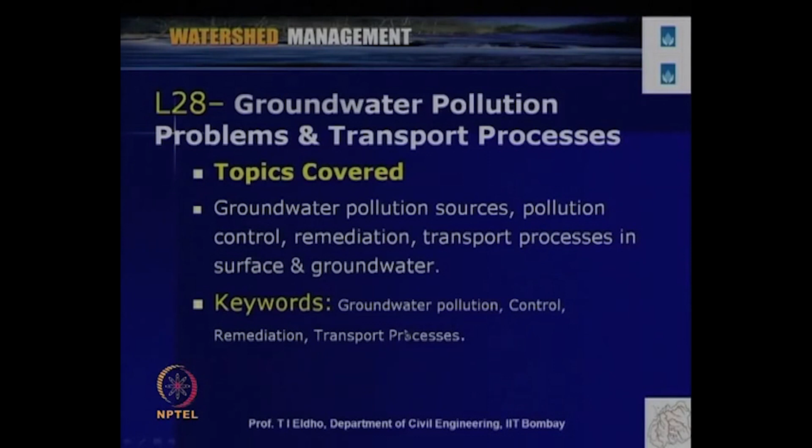In module number 7 on management of water quality, today in lecture number 28, we will discuss groundwater pollution problems and transport processes. Some of the important topics covered today include groundwater pollution sources, pollution control, groundwater pollution remediation, and transport processes in surface and groundwater. Some of the keywords for today's lecture: groundwater pollution, control, remediation and transport processes.

As we discussed earlier, when we deal with water management within a watershed, we have to deal with the surface water and the groundwater. It is not only the quantity of water to be made available to the flora and fauna or to the people within the watershed; we have to see the quality of the water. As we discussed in the previous lecture, surface water quality as well as groundwater quality are major issues which we have to deal with nowadays.

Due to various reasons, the quality of groundwater or surface water has deteriorated very much. So, in today's lecture, we will see the problems related to groundwater quality. In the last lecture, we discussed the surface water quality issues. When we deal with watershed management, groundwater is a major component as far as water resource is concerned. Groundwater is a part of the hydrological processes which we have already considered.

With infiltration, the water joins the water table or the aquifer systems, and then interacts within the systems. So, if any pollution source is there on the surface of the planet or the watershed, it will affect not only the surface water but the groundwater also. So, when we deal with watershed management, groundwater quality is also a major issue.

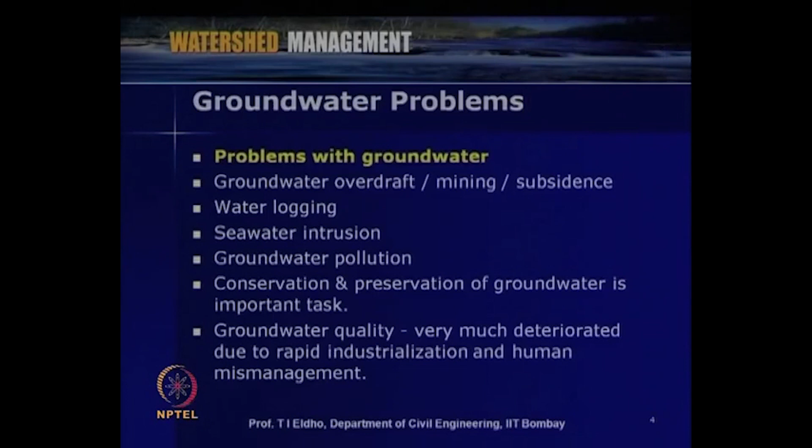It is not happening mainly due to natural causes, but due to human interventions within the system, and it is not appropriately done. So, those are some of the major reasons as far as the deterioration of the groundwater is concerned. So, as we discussed earlier, as far as the management of groundwater systems is concerned, we have to deal with the quantity of the groundwater and the quality of the groundwater.

So, as far as quantity is concerned, the total volume that may be withdrawn annually from the aquifer. So, we have to see that there is a balance between what is recharged and what is withdrawn from the aquifer systems, so that the groundwater table will not go down drastically. And then the location of pumping and artificial recharge wells and their rates.

So, if you consider an aquifer system, depending upon the recharge rates, how much we can pump out of the aquifer systems, or if you are going for recharging, how much we have to recharge with respect to the available water. So, all these things we have to deal with effectively for groundwater management.

So, we have to take certain decisions as far as the groundwater quantity is concerned and also groundwater quality is concerned. So, as I mentioned, even if sufficient quantity is available, if the quality of the groundwater is not good, then we cannot use it for the purpose it is meant for. So, we have to take decisions related to groundwater quality.

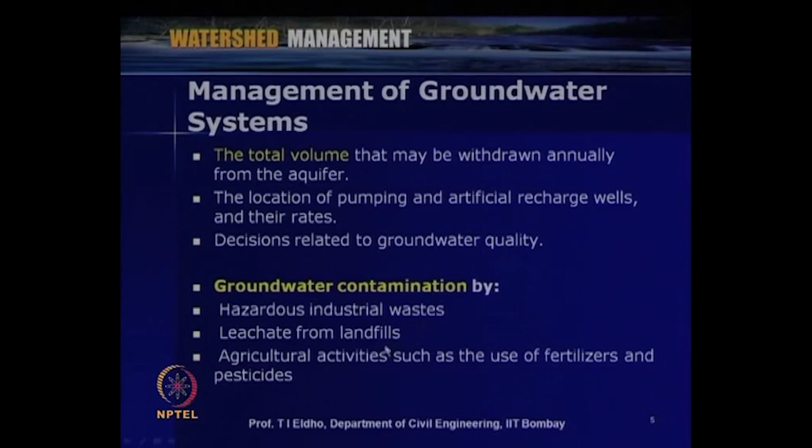So, groundwater contamination, as I mentioned, can be due to various sources like hazardous industrial waste, leachate from landfills, agricultural activities such as the use of fertilizers and pesticides. So, as we discussed in the last lecture, these kinds of pollution can be either point source pollution or non-point source pollution. So, point source is what is coming directly, like from underground tanks, if a leakage takes place and that is going to the aquifer systems, that is point source.

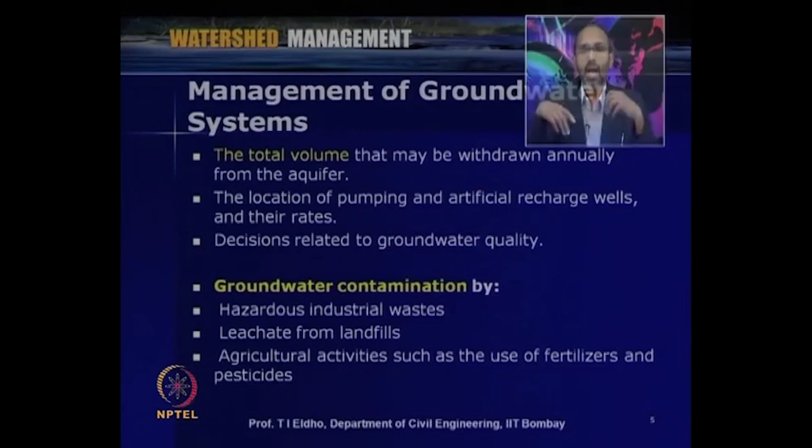But non-point source, like agricultural sources, say nutrients or herbicides or pesticides, these kinds of pollution are non-point source pollution. So, we have to deal with the groundwater systems effectively. That way, groundwater systems have to be managed effectively as far as quantity and quality are concerned.

So, management means making decisions to achieve goals without violating specified constraints. So, for example, from a given aquifer, if we want to pump out 1000 meter cube per day, the objective is to meet that 1000 meter cube per day,

but we have to see that certain constraints are met, like the groundwater level should not fall below certain specified limits, or the quality of the groundwater should be good enough with respect to the standards for drinking water or agricultural purposes. So, we have to see that specified constraints are met.

So, good management requires information on the response of the managed systems to the proposed activities. So, here that means the aquifer systems or groundwater systems. So, if we are pumping this much water, what happens, or if a contamination is going through the groundwater system, how it is spreading and what will be the effects. So, this information enables the decision maker to compare alternatives and ensure that constraints are not violated.

So, for example, if there is a pollutant source to the aquifer systems, and water is pumped for drinking or water supply purposes from that aquifer system, then whether there will be an interaction. So, how we can manage this pollution source or the plume.

So, the decision maker has to take a decision by considering various options like groundwater modeling or groundwater pollutant modeling or contaminant transport modeling. So, any planning of mitigation or control measures once contamination has been detected requires the prediction of the path and the fate of the contaminants in response to the planned activities.

So, like you say, if we are going for the control measures, we have to see how much portion of the groundwater system is affected, where the plume is moving and at what rate it is moving, and whether that will reach the pumping well which we are pumping for water supply or other purposes. So, all these issues we have to see.

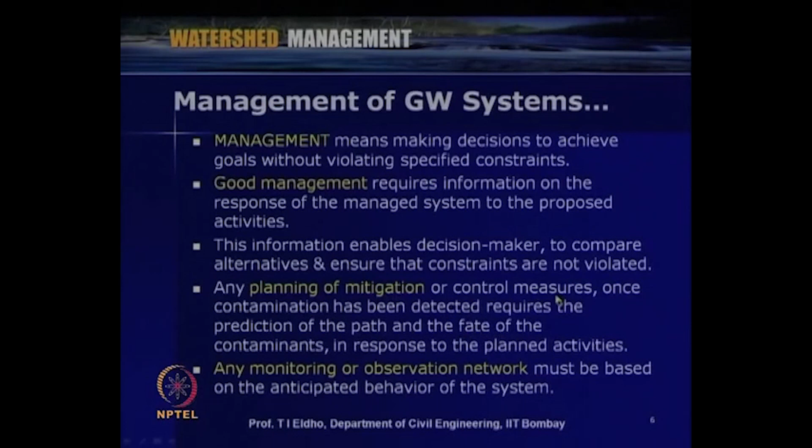So, any monitoring or observation network must be based on the anticipated behavior of the system. Through groundwater modeling we can identify the anticipated behavior of the system. Then, if we have a monitoring or observation network, through that we can identify the best way we can manage the groundwater systems as far as groundwater pollution is concerned.

So, what we are discussing is related to groundwater system management with respect to quantity or quality. Now let us go into the details of groundwater pollution sources and then pollution control and the remediation aspects. So, groundwater pollution problems. As I mentioned, when we are dealing with the water resource in a watershed, we have to see that not only is sufficient quantity of water available, but quality is also good enough. The water is useful only if quality is safe. So, that is a very important aspect.

So, quality is indicated, as we discussed in the previous lecture, by various indicators like dissolved or suspended solids, whether the water is basic or acidic, like a pH indicator, or the biological quality. So, when we discuss on a watershed basis, a river basin basis or an aquifer basis, we have to see what are the important sources of pollution. And then we have to see what are the important forms of pollution, whether the form is dissolved salts or domestic or industrial waste, or heat pollution or radioactive materials, pesticides, manures, etc.

So, what is the source of pollution, what kind of pollution is there, what is the form of pollution, and then how the pollutant or the contamination is moving within the aquifer system. Pollutant transport or solute transport generally takes place with the flowing water. In the aquifer system, the groundwater is moving from one location to another according to the hydraulic gradients and other parameters. So, we have to see how the solute is transported. Various processes, as we discussed earlier, like advection and hydrodynamic dispersion, control the pollutant or contaminant movement within the aquifer systems.

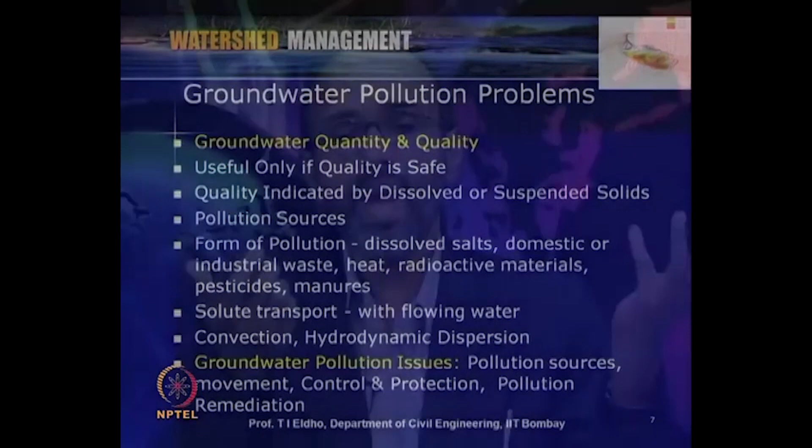So, when we discuss the various issues related to groundwater pollution, we have to see some of the important things like pollution sources, then pollutant or contaminant movements, then how we can control the movement of the plume or contamination, and then how we can protect the groundwater systems, and wherever it is polluted, how we can remediate it, so that we can retrieve it back, even though not to the original quality, but to a certain extent. So, what kind of remediation is possible. All these issues we have to consider.

So, groundwater pollution issues include source identification, then identifying the movement of the contaminant, then control and protection, and then pollution remediation. These are some of the important issues which we have to consider when we deal with groundwater pollution. So, now let us look into the important sources of pollution.

So, groundwater contamination sources. Here I have listed some of the important contaminant sources, like natural contamination, agricultural contamination, industrial contamination, underground storage tanks, land application and mining, septic tanks, waste disposal injection wells, landfills, etc. If this is the watershed or area which we are considering, if farms are there, then non-point sources of pollution, and then septic tanks or landfills. With rainfall, the contamination will be seeping down, and then that will be joining the surface water or the groundwater.

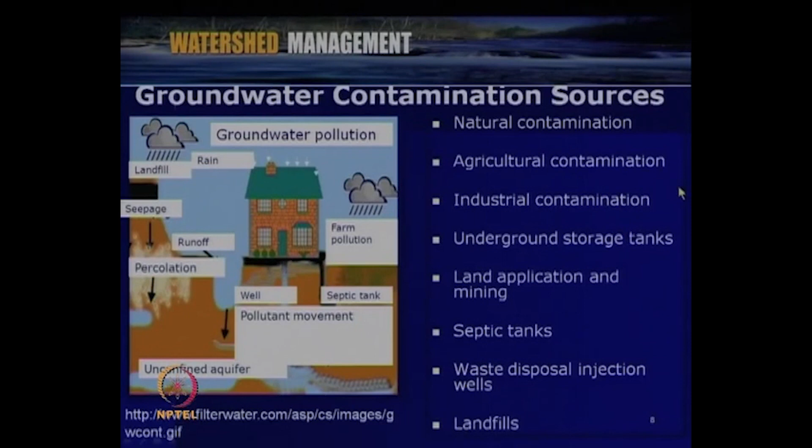So, that way various sources of pollution are possible. We have to identify the important sources of pollution, and then deal with the corresponding source to control the pollution and for remediation. Now let us look into various aspects of these groundwater pollution sources. As I mentioned, the important sources of pollution we have already discussed. The first one is domestic waste. Domestic waste can be like household waste, septic tanks; the liquid fraction from septic tanks pollutes groundwater, and inefficient design increases pollution.

So, especially household waste, especially the sewage water coming from the house, most of the time will be directly draining either to the surface water or the drainage systems. That can penetrate down or infiltrate down to the aquifer system. So that way domestic waste can be a source, and where septic tanks are there, the leakage related to septic tanks can be a source of pollution.

Then agriculture pollution, as we discussed in the previous lecture also. Artificial manure or fertilizers, pesticides, herbicides, then nitrate pollution, eutrophication, health problems. In drinking water, nitrates and those kinds of pollutants are a long term source of pollution. Pesticides, insecticides, herbicides, fungicides, all these things beneficial to farming cause a serious threat to the surface water and the groundwater.

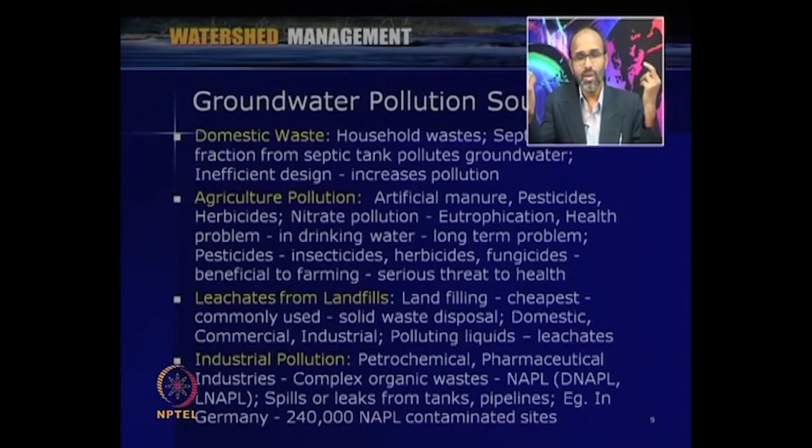If the landfills are not scientifically done and proper measures are not taken, then from the landfill a liquid called leachate is produced when rainwater mixes with the contaminant source within the landfill. That can penetrate down to the aquifer or groundwater systems and become a source of pollution. So the third one is leachates from landfills. It is one of the commonly used cheapest solutions for solid waste, whether domestic, commercial or industrial. These polluting liquids called leachates are a major source of pollution as far as the groundwater system is concerned.

Then the next major source is industrial pollution. Industrial sources like petrochemical industries, pharmaceutical industries. All these produce complex organic waste like non-aqueous phase liquids, dense or light, then spills or leaks from tanks, pipelines. These pollutants, coming directly onto the soil surface, can infiltrate down to the aquifer systems and be a source of pollution to the groundwater, or wherever surface water pollution is there, surface and groundwater interaction makes it a source of groundwater pollution.

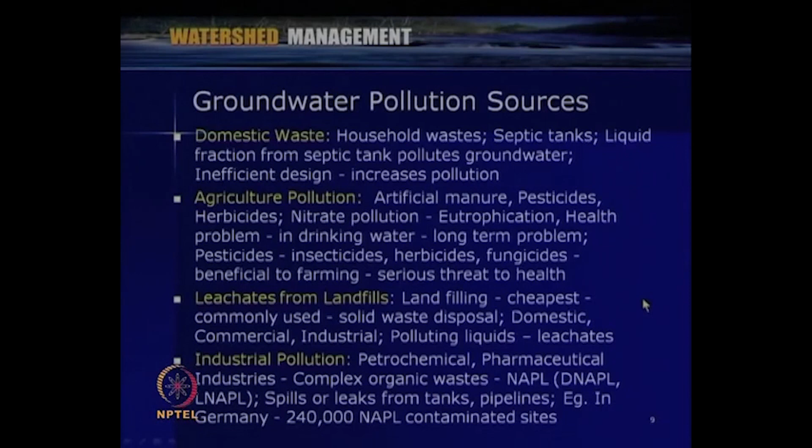For example, in Germany about 240,000 non-aqueous phase liquid contaminated sites have been identified at various industrial sites. So industrial pollution is a major source of pollution. Then contaminated land and urban pollution: the effect of the industrial revolution, like waste disposed in land around urban areas, for example mining and foundry waste, tars, oils, phenols, etc.

These are all sources of pollution for subsurface water or groundwater. For example, in the United Kingdom, about 500 square kilometers of land is polluted, meaning its soil is polluted, in about 50,000 sites. Whenever rainfall runoff interacts with these sites, the contamination forms a plume that moves through the subsurface water and becomes a source of pollution for the groundwater. And then mining and seawater intrusion pollution.

Water draining from mines will be acidic, with sulfates. So a lot of pollution will be there: acidic or sulfate pollution, iron pollution, cyanides, etc., in solution. This pollutes surface and groundwater. So abandoned mines are a major threat as far as groundwater is concerned.

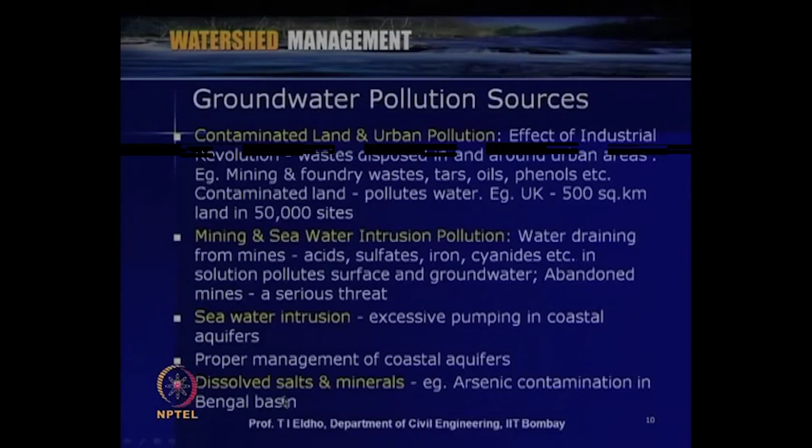Then dissolved salts and minerals, like arsenic contamination in the Bengal basin. This arsenic contamination is actually caused due to overdrafting of the groundwater. Due to that, certain minerals or salts within the soil leach and become a source of pollution. So dissolved salts and minerals are also another source of pollution.

The changes in chemical concentration occur in the groundwater system by four distinct processes. Mainly advective transport, meaning when groundwater is moving, contaminants like dissolved chemicals move along with the groundwater flow.

Then hydrodynamic dispersion, which includes mechanical, hydraulic, or molecular and ionic diffusion. Various intermixing within the pores takes place, and diffusion and dispersion processes occur. So hydrodynamic dispersion is another important mechanism of pollutant or plume movement.

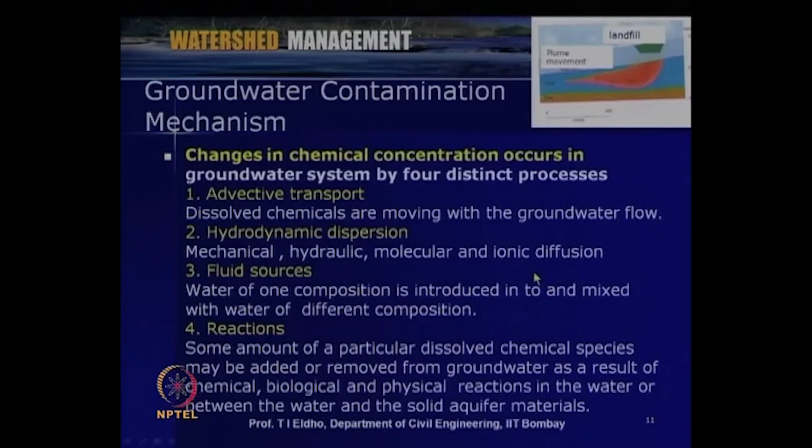So now, what we discussed is we have seen the groundwater pollution sources, and the mechanism of this plume movement or contamination spreading. Now how we can protect the groundwater or control the pollution. Let us look briefly into various pollution control measures. Once aquifers are contaminated, it is very difficult to restore, it is a very expensive process. So it is always sensible to prevent the pollution.

Vulnerability of pollution depends on aquifer nature, like the hydraulic conductivity, what kind of soil is there, and what type of contamination is there. There are many parameters depending upon which the vulnerability may be serious or mild, such as flow speed and unsaturated thickness. So we can prepare vulnerability maps showing the possibility of aquifer contamination.

For example, if there is an industry or a source of pollution identified, then for that particular aquifer system or area or watershed, we can prepare vulnerability maps. So within a certain number of days, this is the area which may be polluted, or if this kind of leakage takes place, these are the possibilities. That way we can have vulnerability maps.

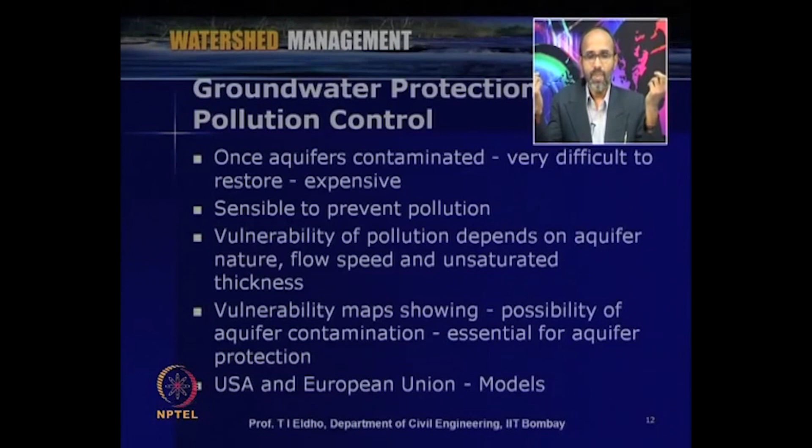In many countries like the United States of America and European countries like Germany, Netherlands, and United Kingdom, vulnerability maps have been prepared since groundwater is one of the important sources of water supply in these countries. To protect groundwater, they have prepared groundwater vulnerability maps. From these maps we can identify whether a particular aquifer system is vulnerable, and what kind of measures can be taken to protect groundwater as a resource.

We have seen that various sources of contamination exist. If we can control the source itself through various strategies, we can reduce the scope of groundwater pollution. So let us look into some aspects of source control strategies, to minimize or prevent pollution before contamination occurs.

This is the main aim of the source control strategies: the volume of waste is reduced or the threat due to waste is reduced. Whether it is solid waste or liquid waste, we can reduce it so that vulnerability is reduced.

This is mostly applicable in new sites, but in older sites we can reduce the abatement and the spreading. The source control strategies depend upon the hydrogeological parameters of the site, how much area is spread, the situation, and the kind of contaminant plume or type of waste. Depending upon that, we can adopt typical source control strategies to minimize pollution or protect the systems.

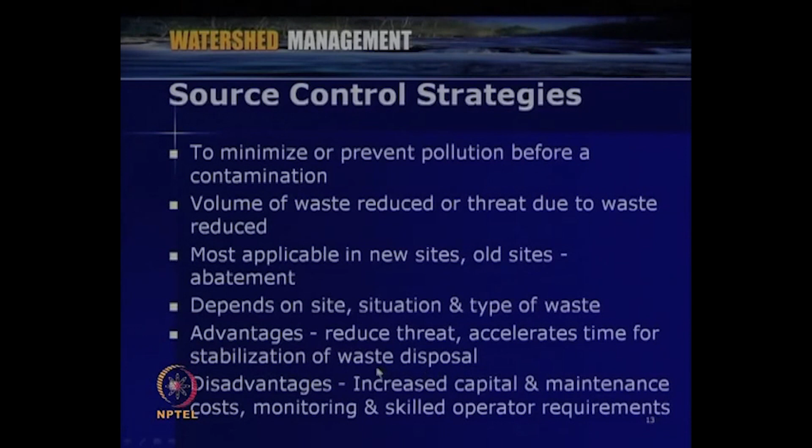Some of the disadvantages include increased capital and maintenance costs, since we have to spend money to control this source so that it does not further spread to the aquifer systems or groundwater system. We also have to go for monitoring, once the source is controlled, of any possibility of further leakage, movement, or contamination. So we have to monitor the system with skilled operators. These are some of the disadvantages.

The first zone is generally defined, in these countries, for example, by 50 days of travel time of the water to reach the well. We can delineate this zone, and absolutely no kind of pollutant or industrial activities are allowed in these zones, so that the water pumped from this area is protected. That is zone 1.

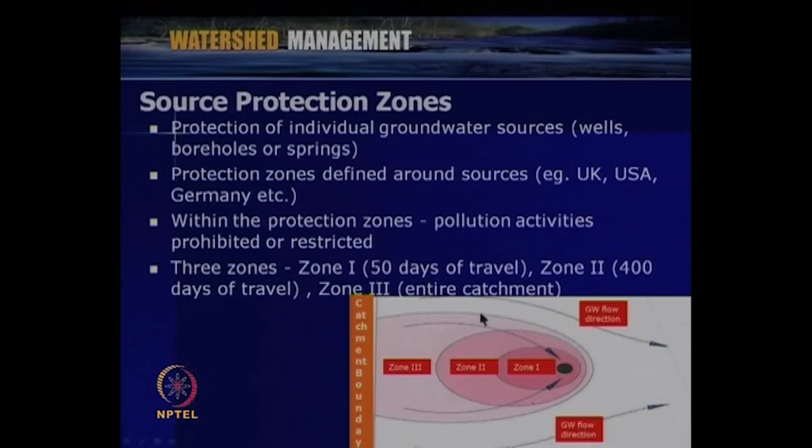The last one is zone 3, which is the entire catchment, especially if the water is used for drinking or water supply purposes. In this zone, certain activities or certain pollutant-causing industries can be stopped. So we can have these 3 zones, and within them pollution-causing activities are prohibited or restricted, as discussed for zone 1, zone 2, and zone 3.

As far as contamination is concerned, we can go for stabilization or solidification strategies. In this pollution control strategy, we isolate the waste material in a solid matrix before landfilling, for example. Stabilization-solidification strategies are very effectively used in many countries.

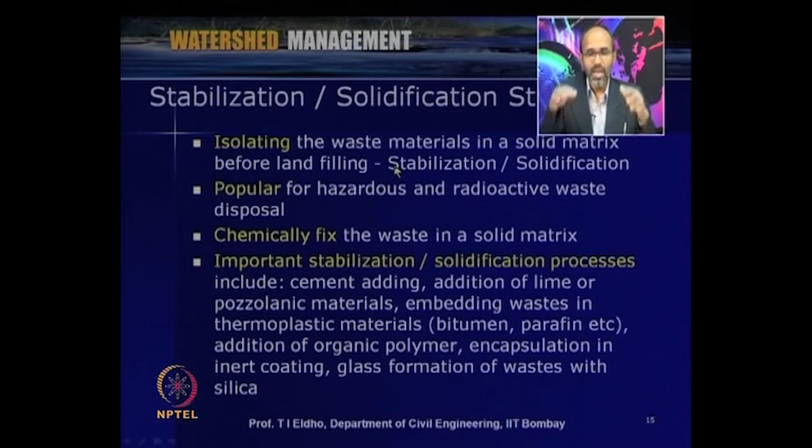These methodologies are popular for hazardous and radioactive waste disposal, especially radioactive waste. We can isolate it, put it in a concrete vault, and place it in a very deep rocky area underground, so that there is no scope for any kind of pollution.

We can also chemically fix the waste in a solid matrix. If a particular type of contamination can be mixed with certain other chemicals so that the material becomes inert, there is no source of pollution. This process is called chemically fixing the waste in a solid matrix.

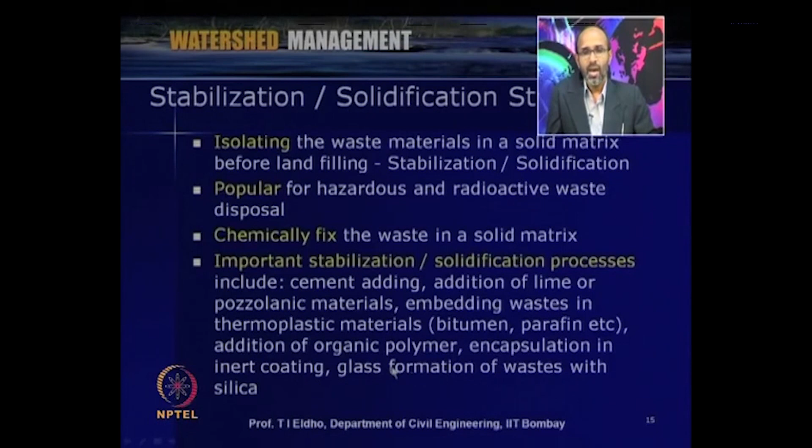Important stabilization or solidification processes include cement adding, addition of lime or pozzolanic materials, embedding waste in thermoplastic materials like bitumen or paraffin, addition of organic polymer, encapsulation in inert coating, and glass formation of waste with silica, among others. There are a number of techniques for stabilization or solidification.

Depending upon the contamination material or pollutant source, we can go for specified stabilization or solidification strategies, and that way we can control the pollutant source so that the groundwater can be protected.

This is actually plume management, where we control the movement of the water phase and hence the plume, so that plume movement is controlled. Generally, three common classes of well systems are used: withdrawal through shallow systems, deep systems, and injection of water. Through pumping or injection, an appropriate hydraulic gradient is generated within the aquifer system, so that contaminant plume movement is restricted and will not go to the nearby area of the pumping well.

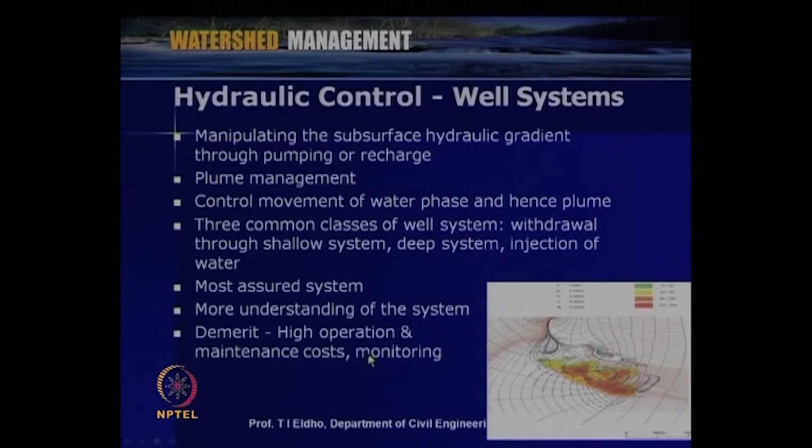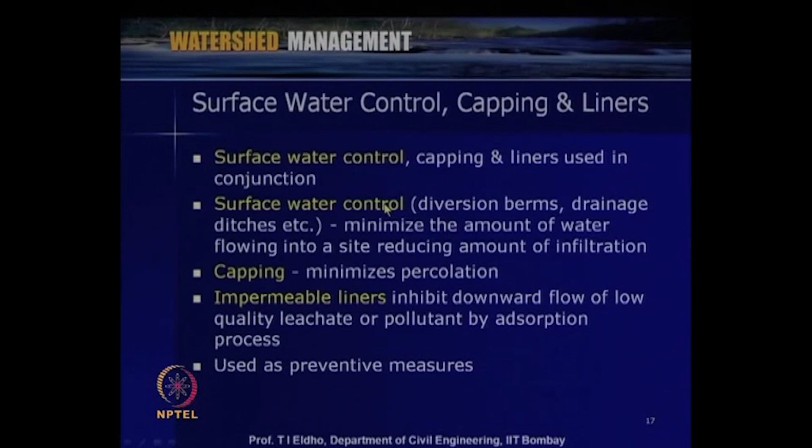Some other techniques are surface water control, capping, and liners. These are also used in many countries for groundwater protection or groundwater pollution control. Surface water control and capping and liners are used in conjunction with each other. The surface water which is polluted, we can control its movement and give certain capping or lining, so that this contaminated water is not moving to the aquifer systems. Another one is surface water control, where we can construct certain diversion berms or drainage ditches, so that the polluted water is not mixing into the aquifer systems. This minimizes the amount of water flowing into a site, reducing the amount of infiltration.

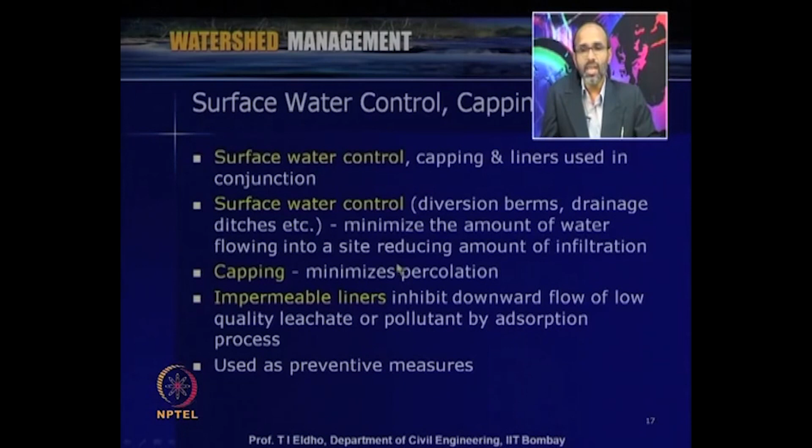We can also go for capping, so that the area is capped, so further contamination does not take place and plume movement is restricted. We can also go for impermeable liners, which inhibit downward flow of low quality leachate or pollutant by adsorption process. We can have impermeable liners using clay or other materials, so that the contaminant plume or contaminant source will not reach the pure water source or the aquifer systems. All these are used as preventive measures, so that we can control pollutant movement and protect the aquifer systems or groundwater systems.

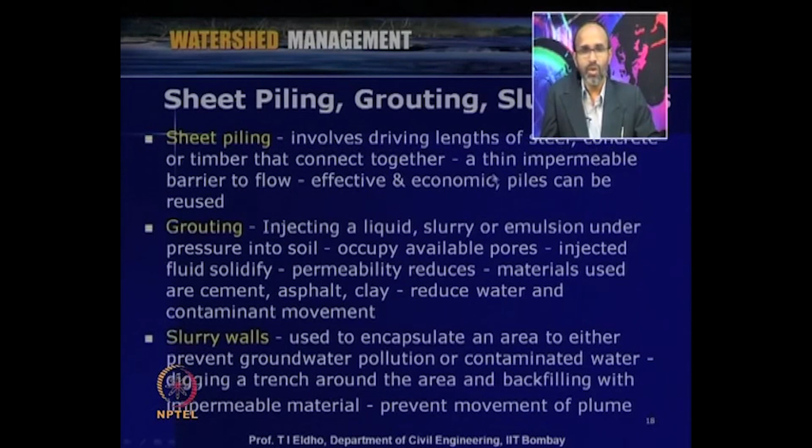Further, some other techniques used are sheet piling, grouting, and slurry walls. Sheet piling involves driving lengths of steel, concrete, or timber that connect together to form a thin impermeable barrier to flow. This is effective and economic, and piles can be reused, so we can control the movement of the pollutant.

Grouting means injecting a liquid, slurry, or emulsion under pressure into soil. This occupies available pores, and the injected fluids solidify, so that permeability reduces. Generally used materials are cement, asphalt, clay. This reduces water and contaminant movement, so that the plume is stopped at particular locations.

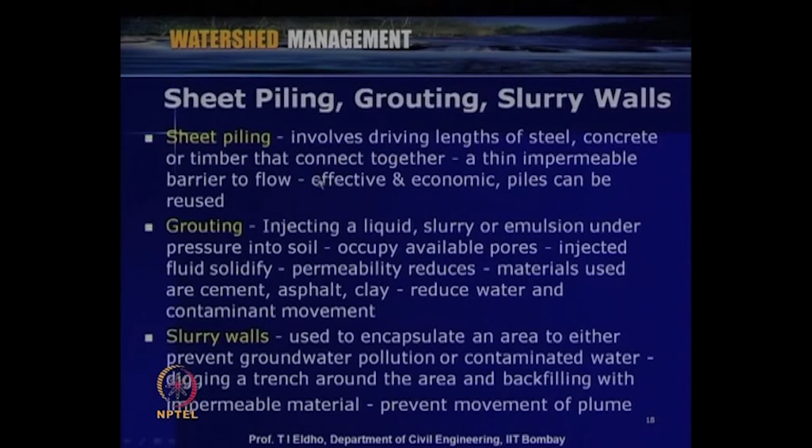Another technique is the use of slurry walls. Slurry walls are used to encapsulate an area to either prevent groundwater pollution or contaminated water, by digging a trench around the area and backfilling with impermeable material. This prevents the movement of plumes. So, as we discussed with surface water control, capping, and liners, this can also be done using sheet piling, grouting, slurry walls, etc.

So now we are discussing groundwater pollution sources, the mechanism of movement of the pollutant, and how we can protect groundwater systems or control pollutant movement. Now, once the groundwater system of the aquifer is polluted, what we can do is called groundwater pollution remediation, where we try to remediate or remove the contamination from the aquifer systems or groundwater system.

But this is a quite complex process, and it is also very expensive. Once groundwater is polluted, the question is how to restore or improve it to an acceptable standard, depending upon the use, whether for irrigation or any other purpose, and how we can get to that acceptable standard.

So, for this we have to study the system thoroughly. First we have to determine the distribution of pollution, then we have to design a remediation strategy. As I mentioned, once an aquifer is polluted, restoring it to the actual original level is an impossible task. But of course, we can take certain measures so that the contamination can be reduced to a certain level, and the aquifer systems or the groundwater can be remediated.

So, in all this process, once a contamination or contaminant plume is identified, the first step is to contain that pollution, the containment of the plume, and the second one is to go for remediation. Containment is also very important; we have to contain the plume movement, otherwise it will spread through the aquifer system. So, first step is containment, second one is remediation.

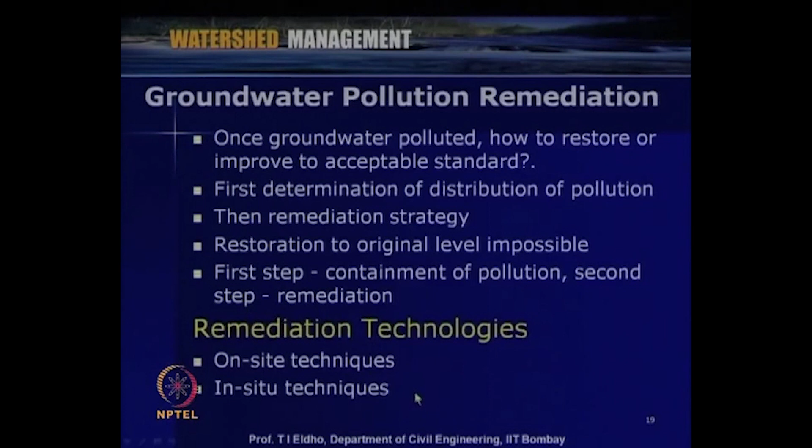Generally, as far as groundwater pollution remediation is concerned, two types of technologies or techniques are used. The first one is called on-site techniques and the second one is called in situ techniques. On-site techniques means generally we pump out the polluted water from the aquifer systems, treat it, and then either put it back to the aquifer systems, use it, or spill it to nearby surface water sources like lakes or rivers.

Then the second one is the so-called in situ techniques. Here we are not pumping out the polluted water; we are adding some materials, like for bioremediation, or using air sparging or various techniques, where at the hotspot, where the contamination is, we are trying to remediate it there itself. So, that technique is called in situ techniques.

So, as I mentioned, in on-site techniques we generally pump the polluted water, treat it and recharge it back to the aquifer systems. One of the most commonly used methods is pump and treat. There we pump the polluted water and treat it, and then either use it or put it back. In situ techniques directly remediate the contaminated water in the aquifer itself.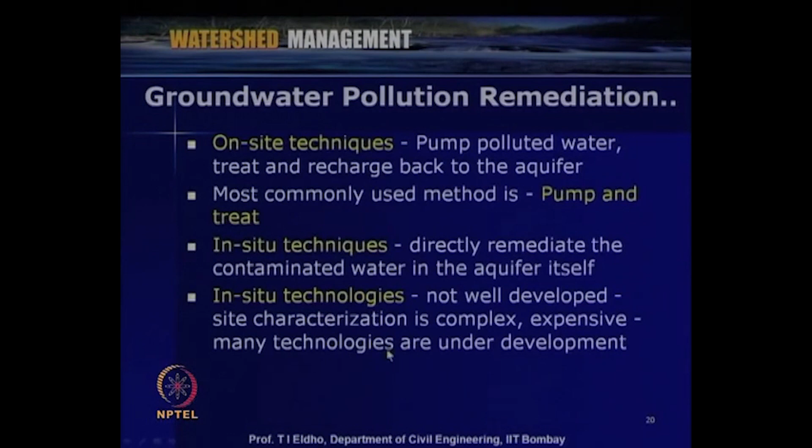So, we will have an overview of some of the important techniques used either on site, the so-called pump and treat, and some of the in situ technologies. We will have a brief review in this lecture. As I mentioned, one of the most commonly used treatment technologies is the on-site technique of pump and treat.

So, here, wherever the contaminant plume is in the hotspot, through boreholes or wells we pump this polluted water out of the aquifer systems, and then we treat it outside depending upon the contamination, and then we can either recharge it back to the aquifer system, use it, or spill it to nearby surface water sources. So, the contaminated groundwater is captured, pumped, treated and re-infiltrated back.

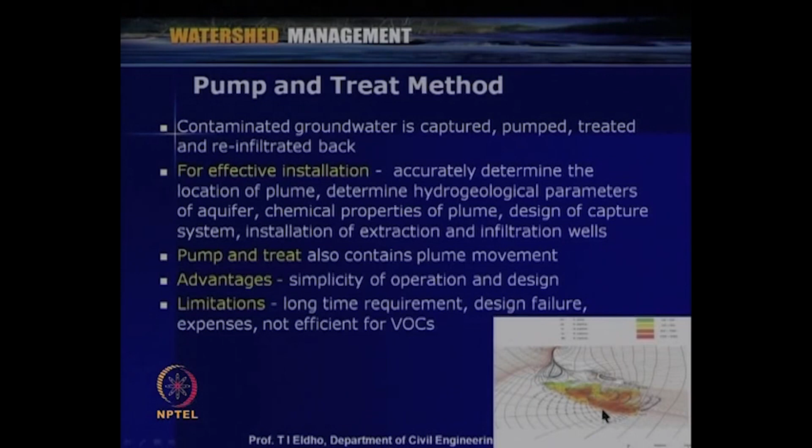For effective installation, we have to accurately determine the location of the plume. This plume location is very important; only accordingly can we design a pump and treat system. Then we have to determine the hydrogeological parameters of the aquifer, like hydraulic conductivity and porosity, then the chemical properties of the plume. Then we have to design the capture systems by pumping, then the installation of extraction and infiltration wells. If we are going to infiltrate back to the aquifer systems, we have to also design the infiltration wells.

So, this pump and treat, as we discussed earlier, is also a plume management technique, or we can use it to contain the plume at certain locations.

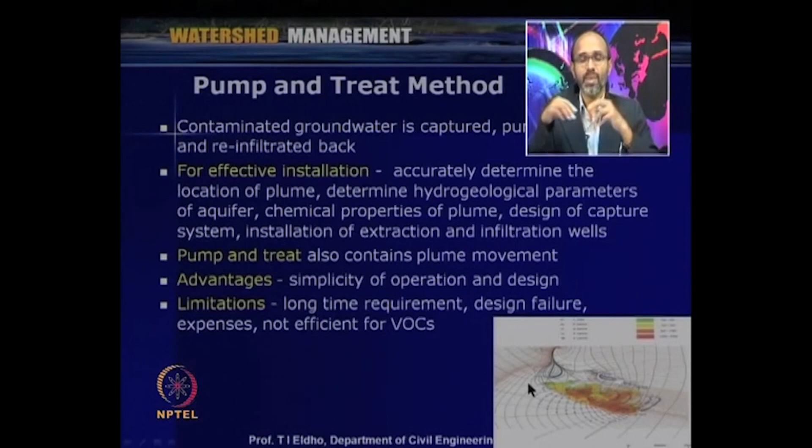Some of the advantages of this pump and treat or on-site technique include that it is simple to operate and the design is simple. But some of the limitations: it needs a long time; depending upon the area and the contamination, it may require many years to remediate an aquifer system. Then there is the possibility of design failure. If the wells are not located properly or the pumping rate is not proper, the pump and treat may not be successful. Then it is very expensive.

And then, for example, for volatile organic contaminants, this pump and treat may not be so effective. So, these are some of the limitations as far as the pump and treat is concerned. So, now let us look into some of the commonly used in situ technologies. So, the first one is so-called bioremediation.

So, in bioremediation, depending upon the contamination, depending upon the plume, we can identify certain microbial bacteria. The activities of this bacteria can be enhanced within the aquifer system itself, so that the contamination is consumed by the bacteria and converted into harmless products. So, microbial processes are used to degrade or transform the contaminants to less toxic or non-toxic forms, mitigating or eliminating the contamination.

As far as microbial processes are concerned, it can be aerobic conditions where sufficient oxygen is available. In the presence of sufficient oxygen, microorganisms convert organic contaminants into carbon dioxide and water. This depends upon the microbial cell mass within the system. So, we can inject oxygen so that the aerobic conditions will be improved.

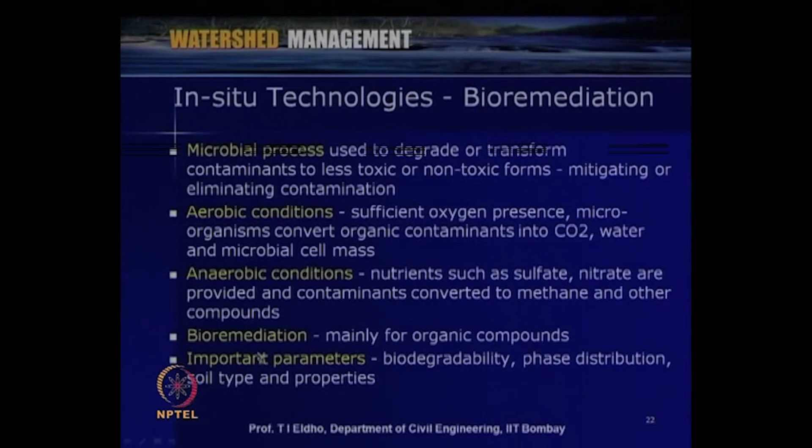Some of the important parameters: we have to identify whether the contamination or the plume we consider is biodegradable, and what is the phase of the distribution. Then we have to identify the soil type, then the properties of the aquifer. All these things are very important for bioremediation, but bioremediation is one of the cheapest techniques available as far as groundwater pollution remediation is concerned.

The only difficulty is that for the given contamination or plume, we have to identify what kind of microbial bacteria can be used for the remediation, and then how to enhance its activities within the aquifer systems. So, this is so-called bioremediation.

Then there are some other techniques like in situ flushing. For example, here we inject an aqueous solution into a zone of contaminated soil or groundwater. Down gradient, we extract the polluted water, and then this water is treated and can be re-injected. So, this is the technique of in situ flushing.

The flushing solution can be simply water, or we can introduce certain chemicals within the water, so-called surfactants or co-solvents. This may speed up the movement of the contamination to the pumping well. So, co-solvents or surfactants can also be added within the systems. In situ flushing enhances the conventional pump and treat, so it can be combined with the pump and treat.

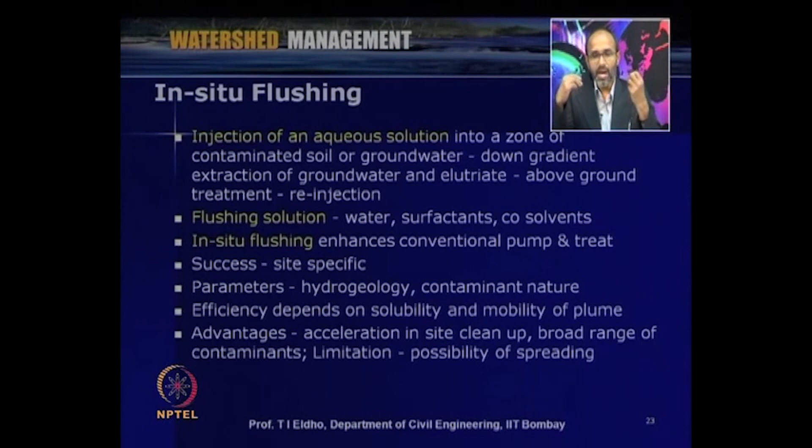Limitations include the possibility of further spreading. When we are putting in the water or the surfactants, there is a possibility that the contamination can further spread in the aquifer systems. So, these are some of the limitations as far as in situ flushing is concerned.

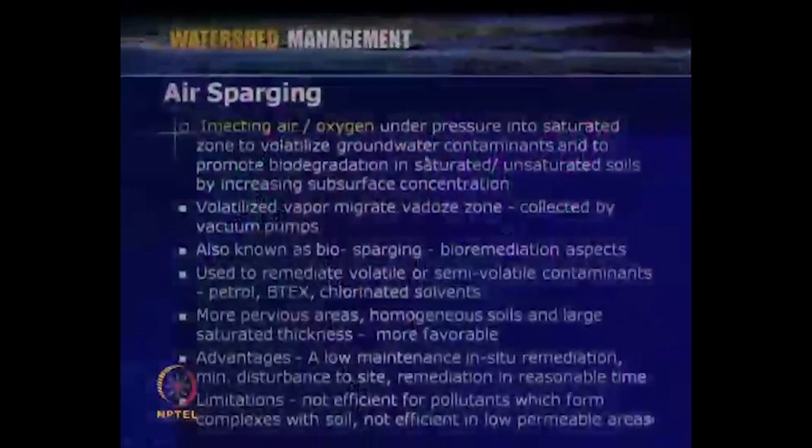Then another commonly used methodology is called air sparging. Here we inject air or oxygen under pressure into the saturated zone to volatilize the groundwater contaminants and to promote biodegradation in saturated or unsaturated soil by increasing subsurface oxygen concentration. Generally, air sparging can be used for volatile organic contaminants. The volatilized vapor migrates through the vadose zone or the unsaturated zone, and is collected by vacuum pumps.

Sometimes air sparging is also called biosparging, since when we introduce the air, the bioremediation process will also be enhanced within the system. Air sparging can be used to remediate volatile or semi-volatile contaminants like petroleum products, BTEX — benzene, toluene and that kind of pollutants — then chlorinated solvents, etc.

It is very effective in more pervious areas, homogeneous soils and large saturated thickness; there air sparging is more effective. Some of the advantages of the system include low-maintenance in situ remediation and minimum disturbance to the site.

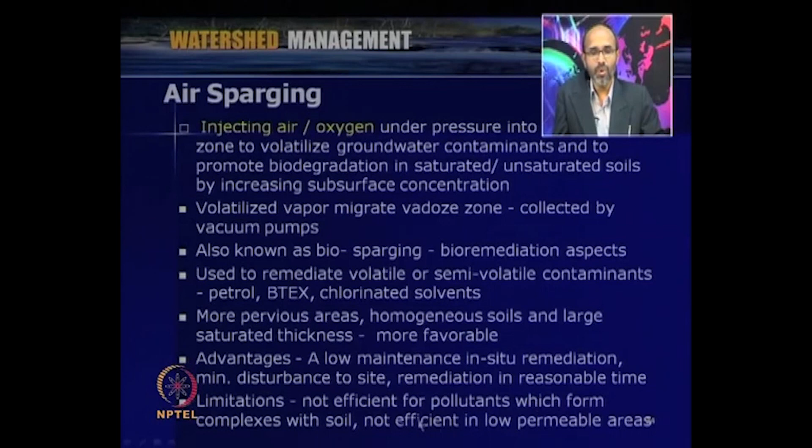So, since this process, once it is set, it will keep on going for a long time without much interference, and remediation can be achieved in a reasonable time. Some of the limitations include: not efficient for pollutants which form complexes with soil, or not efficient in low permeable areas. So, mainly air sparging we can use for volatile organic contaminants.

Then another commonly used in situ technique developed in Germany is called groundwater circulation wells. So, this is an in situ technique for volatile organic contaminants amenable to air stripping. Here what we do, say if this is the hot spot of the contamination plume and this is the aquifer system. So, here there will be a pumping well, and here we create an artificial flow field that flushes and transforms the contaminants from aqueous phase to gaseous phase.

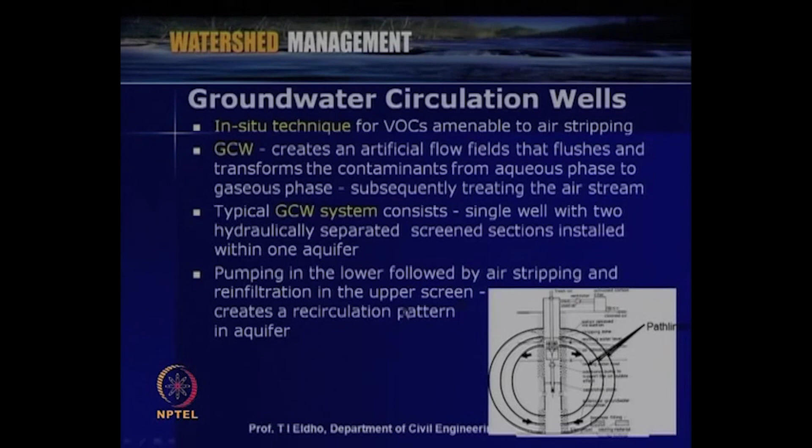So, here we strip with air, and then a hydraulic gradient will be generated, and these are the path lines shown, and here the water is again taken back and then it will be circulated. So, that is why it is called a groundwater circulation well. A typical groundwater circulation system consists of a single well with two hydraulically separated screened sections as shown in this figure. So, pumping in the lower screen followed by air stripping and re-infiltration in the upper screen creates this recirculation pattern in aquifer systems. So, this is the typical pattern.

So, the pumping mechanism controls the circulation processes and the exchange of large pore volumes. So, continuous flushing, dissolution, diffusion and desorption take place. So, this creates a complex 3D flow field, and the efficiency depends upon the radius of influence of the well. So, this is the radius of influence of the well. And then well screen length, number of screens, etc.

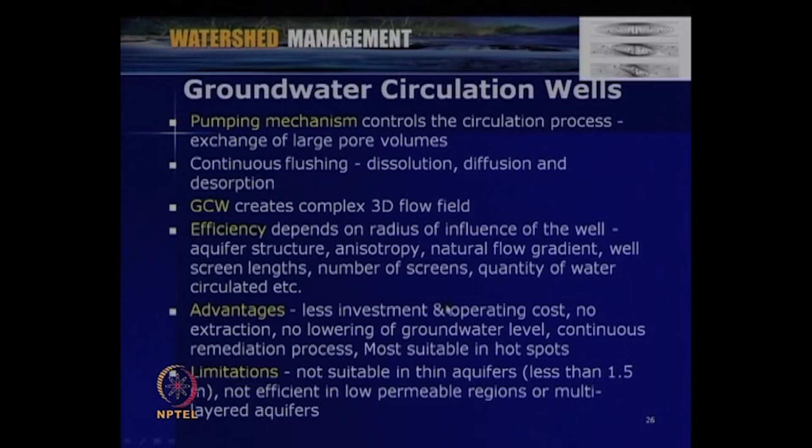So, some of the advantages include less investment and operating cost, no extraction, no lowering of groundwater levels. Some of the limitations: it is not suitable in thin aquifer systems and not efficient in low permeable regions, and this methodology is also used mainly for volatile organic contaminants. So, that is what we discussed about how to remediate groundwater contamination, or how to remediate aquifer systems.

So, now let us see some of the important transport processes taking place within an aquifer or within surface water. These transport processes we are discussing are common to surface water as well as groundwater systems. The processes involved in transport of chemicals from, for example, watersheds are very complex, and they can be physical, chemical and biological. Some of the important physical processes are convection, suspension and deposition, dispersion, diffusion, tillage, etc., what is happening within the watershed.

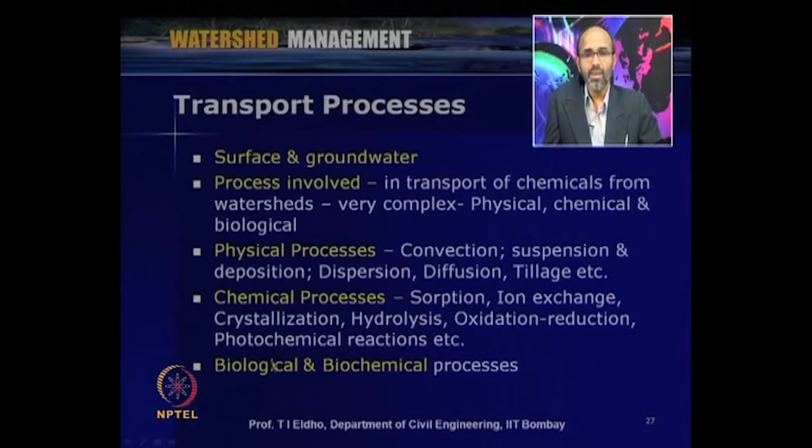Then chemical processes can be like sorption, ion exchange, crystallization, hydrolysis, oxidation, reduction, photochemical reactions, etc. And then the third one is the biological or biochemical processes. So, these are some of the important processes happening as far as the movement of contamination within surface water or groundwater. So, let us look into some of the important details of these transport processes.

So, as I mentioned, convection: the transporting fluid carries the constituents, either dissolved or suspended contamination. So, the water is the principal carrier. The water is moving in surface water in a river or in an aquifer system. So, when the water is moving, the contamination is taken with it. So, that is the process of convection.

Then suspension and deposition means the process by which solid particles are moved into and returned from water. So, it can be rainfall and overland flow; these are some of the major factors as far as suspension and deposition are concerned. The materials held in suspension depend on the turbulence of flow. When the turbulence is reduced, the particle settles. For example, when rainfall takes place, the overland flow level can keep on increasing, and depending upon the velocity, turbulence can be generated, and suspension; when the velocity comes down, the turbulence is reduced, so the particle settles or deposition takes place.

Then another important transport process is so-called dispersion. This is the result of irregular or unequal transport either in surface water or groundwater. So, eddies and other turbulence in streams, canals or rivers, and in porous media, the pathways, since the soil matrix is packed in such a way that there is a sinusoidal movement within the soil matrix. So, that can be a reason for dispersion. So, some constituents move ahead or lag behind. Then another transport process is diffusion.

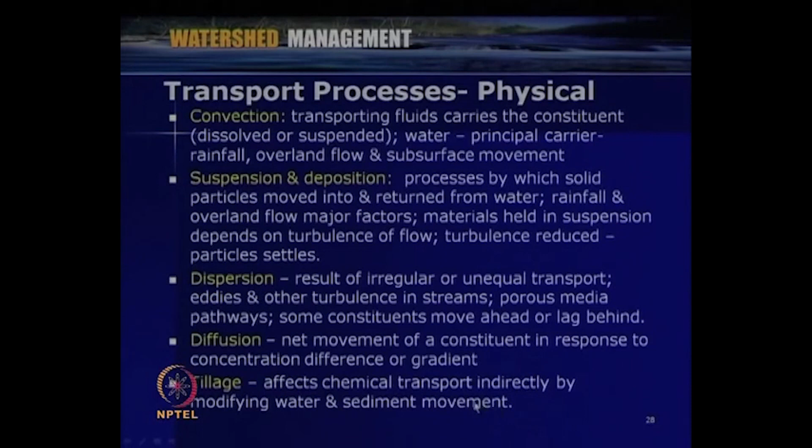So, net movement of constituent in response to concentration difference or gradient. So, this is the process called diffusion. Then in watersheds, say tillage affects the chemical transport indirectly by modifying the water and sediment movement. So, tillage means the soil surface is changed, the pattern is changed by tilling. So, that can affect the movement. So, these are some of the physical processes which can take place as far as the transport is concerned either in surface water or groundwater.

Now, as far as chemical processes are concerned, the first one is sorption. So, this means the movement of a constituent between the solid and the solution phases. So, sorption can be adsorption, which occurs when a chemical leaves the solution and adheres to some solid, and it can be desorption, that means the reverse process. So, at equilibrium a balance between desorption and adsorption can take place. So, this is one of the important chemical processes.

Then ion exchange. So, the exchange of an ion in a solution for an ion of similar charge on the surface of an oppositely charged solid. So, this is so-called ion exchange. Then the transport process can be crystallization. It occurs when concentration of a chemical in solution exceeds its solubility. So, then automatic crystallization starts, so that the concentration reduces.

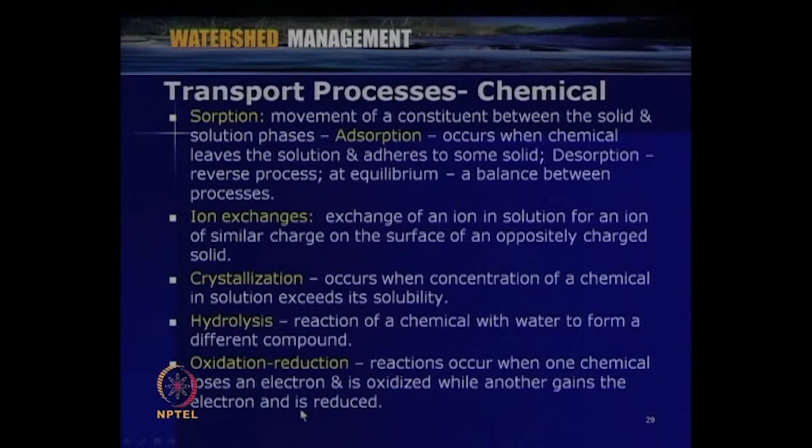Then another important chemical process can be hydrolysis. So, this is the reaction of a chemical with water to form different compounds. So, this is the process called hydrolysis. So, this is also a transport mechanism, the chemical transport. Then oxidation and reduction. So, reactions occur when one chemical loses an electron and is oxidized while another gains the electron and is reduced. So, these are some of the important chemical transport processes which can take place either in surface water or in the groundwater.

Then some of the important processes like biochemical processes or biological processes. In biochemical processes, enzymes that various microorganisms contain can accelerate reaction rates. Organic chemicals can be transformed into other chemicals by oxidation, reduction, hydrolysis and other reactions occurring in the microorganisms. So, similarly, various biological processes like activities of bacteria or viruses can also change the transport phenomena happening within the surface water or groundwater.

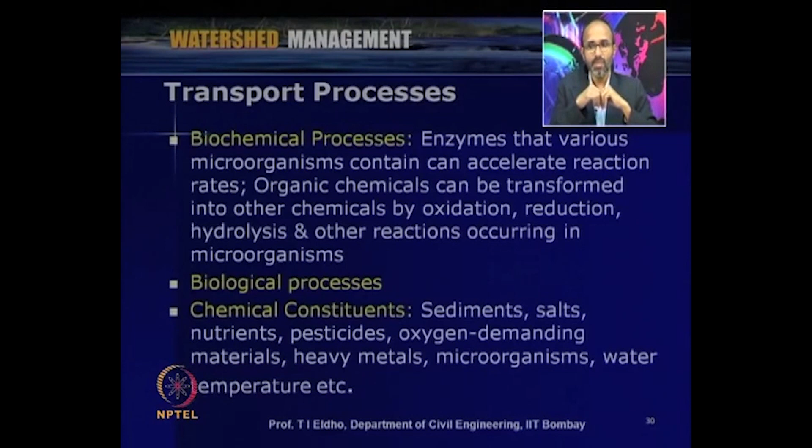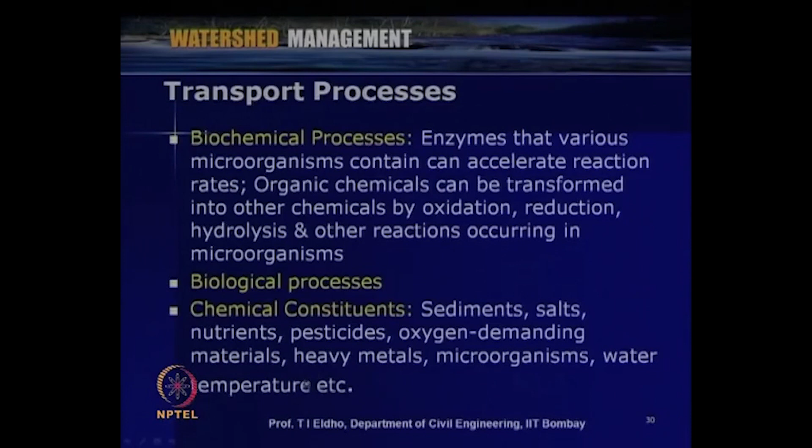So, as we discussed, as far as the water is concerned, either surface or groundwater, some of the chemical constituents can be sediments, salts, nutrients, pesticides, oxygen demanding materials, heavy metals, microorganisms, water temperature, etc. So, these details we have seen in the last lecture. So, now based upon what we discussed in the last two lectures, in the next lecture we will be discussing water quality analysis and water quality modeling with respect to this transport process which we discussed.

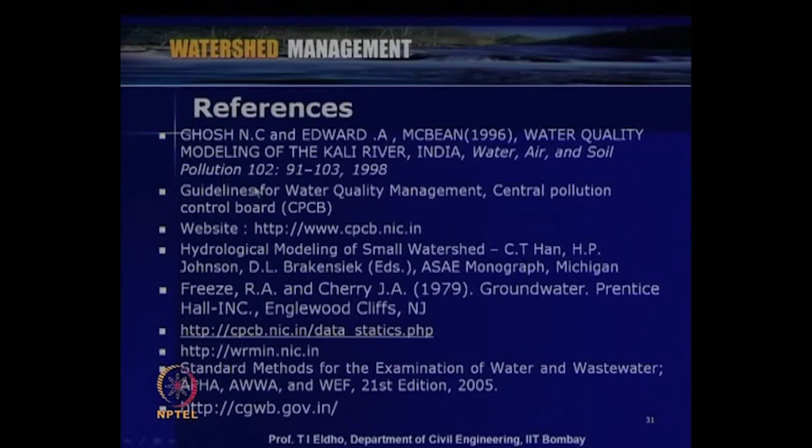In this lecture, some of the important references used for today's lecture include some websites from the Central Pollution Control Board, Water Resource Ministry, Groundwater Board, and some of the textbooks like Groundwater and then guidelines for water quality management.

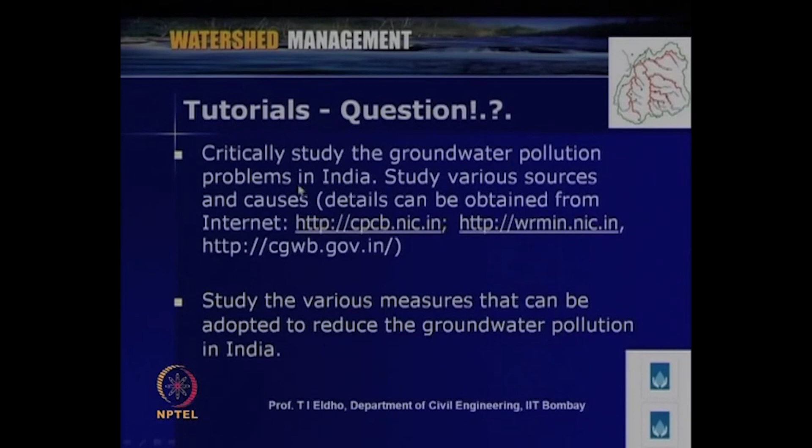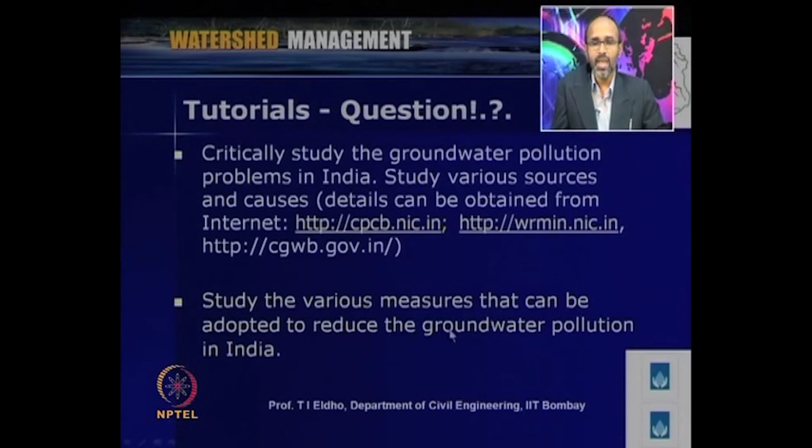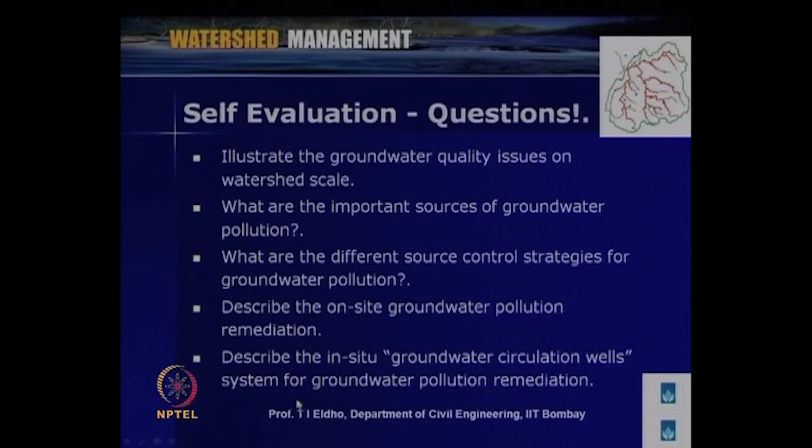Then some tutorial questions for today. Critically study the groundwater pollution problems in India, study various sources and causes. So, you can get the details from the CPCB or Water Resource Ministry website. Study the various measures that can be adopted to reduce the groundwater pollution in India. Then some self evaluation questions. Illustrate the groundwater quality issues on watershed scale. What are the important sources of groundwater pollution, what are the different source control strategies for groundwater pollution, describe the on-site groundwater pollution remediation, describe the in-situ groundwater circulation well systems for groundwater pollution remediation. So, these questions you can easily answer by going through today's lecture.

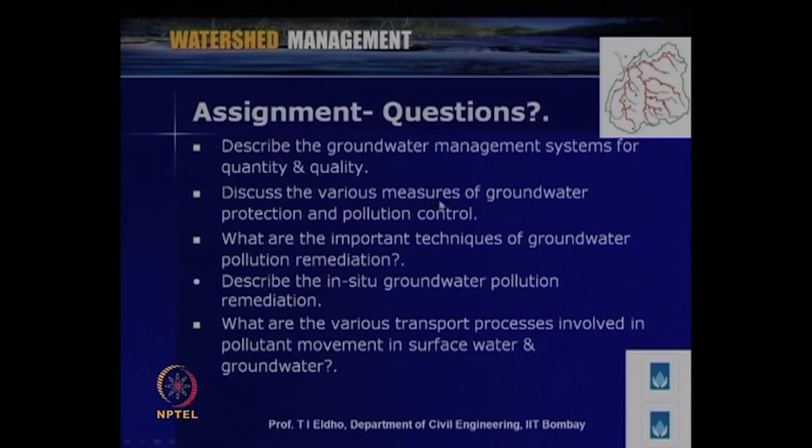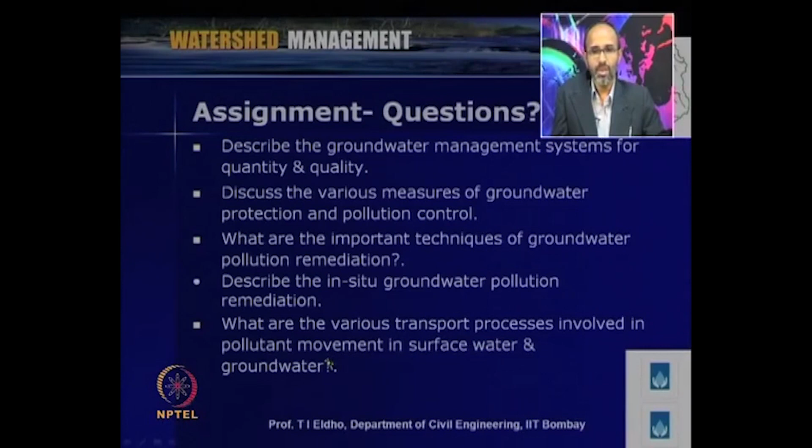Then a few assignment questions like describe the groundwater management systems for quantity and quality. Then discuss the various measures of groundwater protection and pollution control. What are the important techniques for groundwater pollution remediation? Describe the in situ groundwater pollution remediation. What are the various transport processes involved in pollutant movement in surface water and groundwater? So, all these questions you can answer by going through today's lecture.

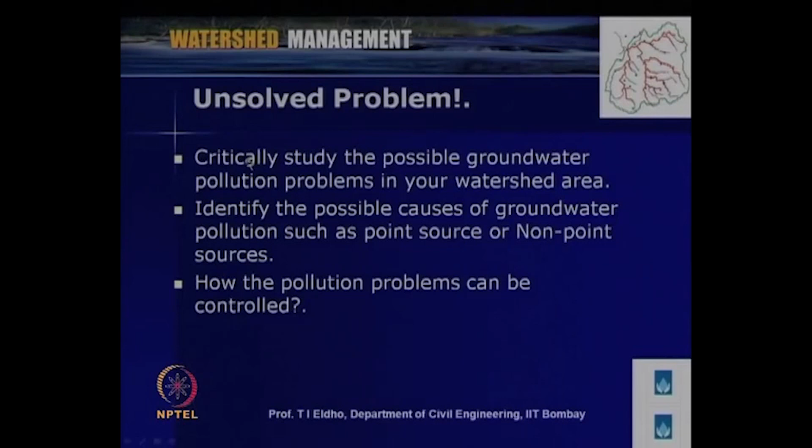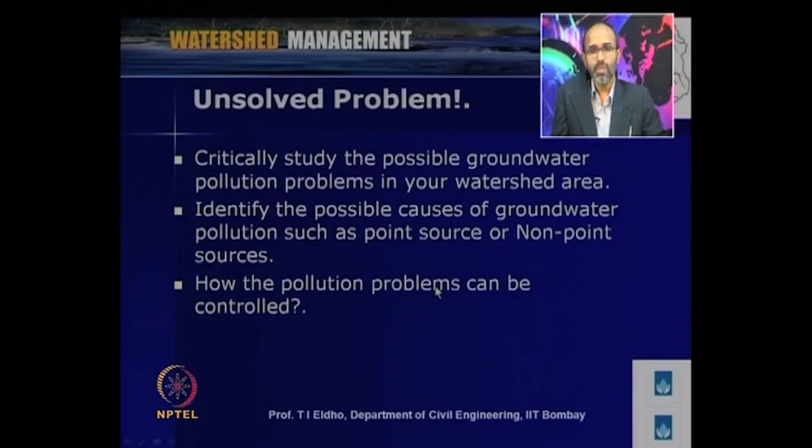And finally, one unsolved problem. So, in your area, in your watershed, critically study the possible groundwater pollution problems, identify the possible causes of groundwater pollution such as point sources or non-point sources, agricultural sources or industrial sources. Then study how this pollution problem can be controlled or what kind of remediation activities can be adopted wherever pollution problems are there.

So, what we discussed today includes the groundwater pollution sources, then pollution control and then remediation, and we also discussed the transport processes taking place either in surface water or groundwater. So, in the next lecture we will be discussing water quality modeling, how we can model the pollutant movement in surface water or groundwater.